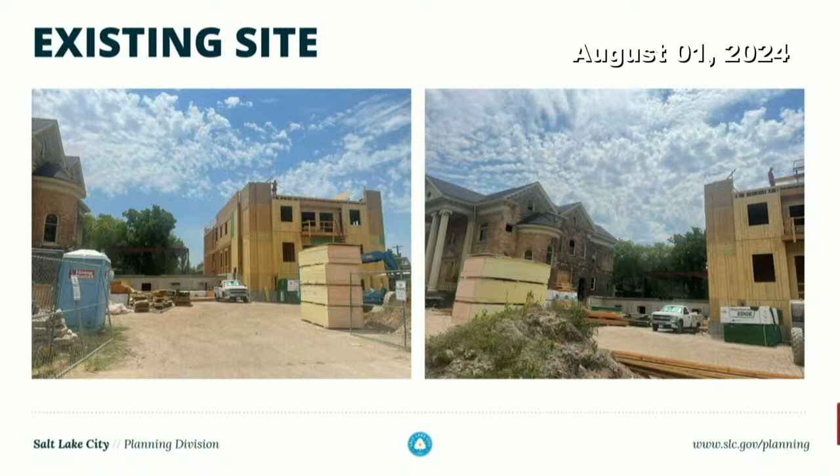This project has had some previous approvals. It was originally approved by the HLC in 2017. There were some administrative changes to the approval in 2018 and 2019, and then an additional modification was approved by the commission in 2021. There's a discussion of these attached to the staff report, including the previous staff reports, and a summary of the administrative changes. Staff is recommending approval of the proposed changes.

That concludes staff's presentation, and the applicant is here and wishes to speak. Do we have any questions for staff yet? Okay, then let's go ahead and bring the applicant up.

And the applicant is Brandon Harris. Hello, Phil. Brandon Harris works with us. Okay, thank you so much for hearing me, ladies and gentlemen of the council. I appreciate your time. We had a... can you press? Got it. Turn on your microphone. There, can you hear me now? I can hear you now.

We had an unfortunate set of events. The architect and our owner, who we're building for, has made so many modifications to the plans, and you can see over the years it's been to you so many times. In the time period that we started the project, the architect has passed away. The architecture firm was Smith Hyatt. They're no longer in business. Amazing architect, but we spent about $500,000 on plans only because the building was redrawn 14 times.

So we made the decision that it'd be better to tie the brick in from the original building back to the new building, but there's still a delineation between the new brick and the original building, and to create the parapet so that we can drain water off the other side of the roof. These changes for us made sense.

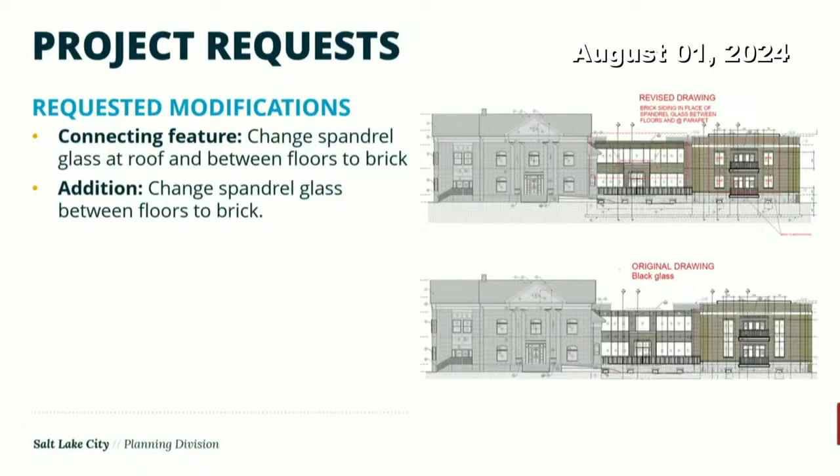You also can't physically do spandrel glass to a flat wall, you have to have something that carries over it or above it. What is spandrel glass? Sorry, I'm not an architect. It's glass panels that are connected together through an inside system, but they come to a flat top. You can put usually like a metal cap over it, but in this original design, it showed that the spandrel glass ended at the top of the roof. That doesn't sound right. Good, okay.

Anything else? That is all at this. I would like to ask another question, and you can say no. On the original building, they have... and she's gonna be mad at me because this wasn't part of it.

They have precast in there, but the sandstone that we took off the building originally, that's absolutely gorgeous. We would like to use that sandstone as the band to kind of show that there is something old with something new on the two white bands, and I'm sure I'm gonna have to fill out another application, so I'm sorry, probably just threw that in.

So it's the white, I'm trying to buy 2 cars for 1 price. I get it. So it's the white sandstone? Yes, it's the sandstone that's on the, it's like a tan or a cream sandstone.

But it's not your regular red sandstone. I was literally there yesterday filming the back of the property to point out in a TikTok I'm doing about how the sandstone is black from the coal dust we used to have. It's really evident, and a wonderful picture to show people how bad our air used to be.

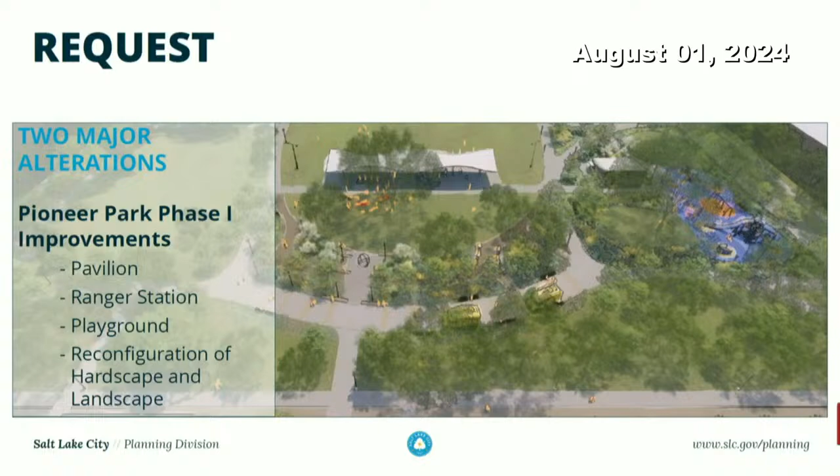And for this work session, we're hoping to have a discussion on the design so that it can be finalized and returned to HLC for a decision. The 2 major alteration applications for the improvements include a pavilion, a ranger station, a playground, and the reconfiguration of the hardscape and landscape in the park.

This work session request is specifically to answer 2 questions so that staff can gain better direction and that the Public Lands Division can finalize the design. The 2 questions are on this slide.

So first, does the Ranger building meet the guidelines of the Pioneer Park CLR, namely appropriate materiality, transparency, articulation, and form? And second, do the proposed new buildings, both the Ranger building and the pavilion, appropriately meet standard 8 and 21A 34020 G8 for contemporary designs?

If the Ranger building is, quote, compatible with the size, color, material, and character of the property, neighborhood, or environment.

So just a little background. Y'all know Pioneer Park, but just briefly, it is located approximately 350 South, 300 West. It does encompass an entire city block, and it was the city's first park to be listed on the National Register of Historic Places, and is also a local landmark site. This is the first phase of improvements for Pioneer Park, located on the north portion of the park and includes approximately 3.5 acres for Phase 1.

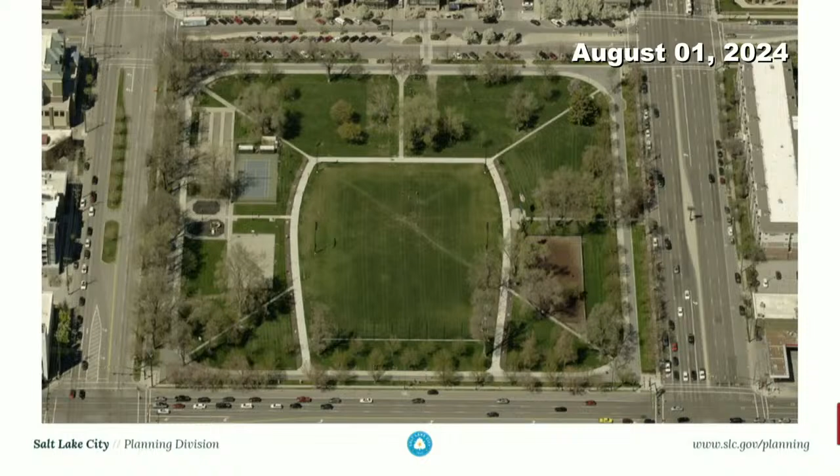Currently, there are mature trees, open fields, a tennis, bocce ball, and volleyball courts, and it is home to many community events.

So the changes to the site design and the hard surfacing include...

Actually, let me back up a little bit. The CLR was heard by this commission in 2023 and was adopted. The Pioneer Park CLR, a cultural landscape report, prescribes guidelines for alterations to this landmark site that the proposed Phase 1 improvements may be weighed against.

This map, I'm confused, should it be flipped? Because we've got 400 West and then 300 West over here. This is the northern portion of Pioneer Park. It's just cut. Oh, I see how we're doing it. Okay, so it's half of the block. Sorry. That's okay.

The interior circular ring facilitating pedestrian movement will remain on the site, as will the exterior circular pedestrian ring and cardinal access from the exterior to the interior ring.

Phase 1 improvements will include expanding the hard surface circulation in the park to include a meandering hard surface walkway. This walkway will also facilitate food trucks.

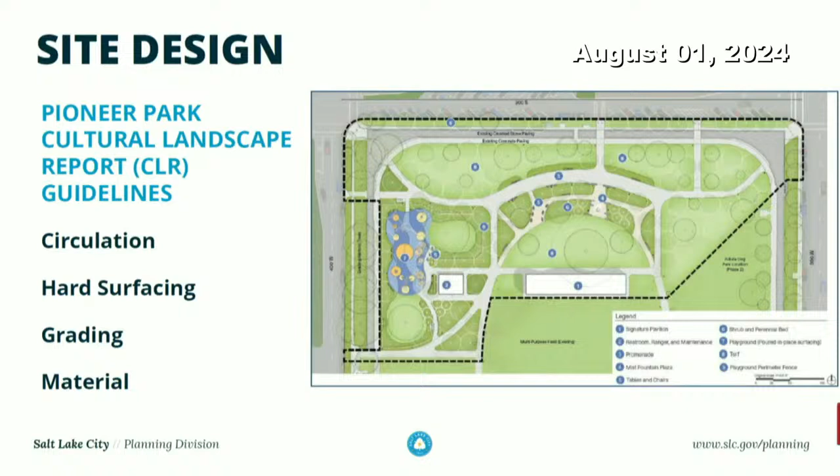The topography of the park will remain the same, and while hard surfacing in the park will increase, it does meet the recommended maximum stated in the CLR. It appears to staff that the recommendations in the CLR are being met with the proposed site design alterations.

So next, the pavilion. This is a major focus of the landmark site and will be placed in this northern area. This will also facilitate public or private events in Pioneer Park.

It's approximately 150 feet by 30 feet, encompassing approximately 4,500 square feet. It will have a rolling form constructed of standing seam metal roofing and tube steel, oriented to the south lawn and the north lawn areas.

And now the Ranger Building. The land use is a restroom, a park ranger station, and maintenance. The size is approximately 1,080 square feet, and it will be oriented toward the north and the east.

The material includes a painted steel awning, proposed to be along the north and east facades. Those facades allow access to the public restrooms and the Ranger Hub. This tube steel awning will reflect the design of the pavilion to the east.

The west and south facades will have minimal architectural articulation and will generally only consist of building access for mechanical and maintenance facilities. The majority of the exterior will be cast-in-place concrete with an accent wall highlighting restroom entries. Perforated metal screening will be located at the Ranger Hub and kiosk.

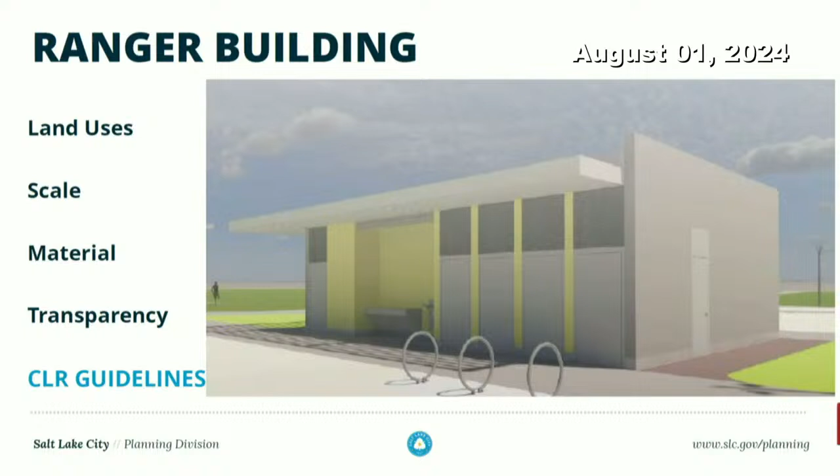Transparency has been a sticking point with this building. The CLR guidelines recommend that a minimum of 60% transparency is maintained. This is not currently being met and will need to be updated prior to the design returning to HLC.

So the playground and the water feature will be located west of the Ranger Building and the pavilion. The existing park features—bocce ball, volleyball, and tennis courts—will all be removed. The water features are proposed to the north of the pavilion and just south of the promenade.

In this 30% plan set, the water feature will consist of a mist fountain. The final design of these features will receive direction from the Salt Lake City Arts Council prior to the final design returning to this commission.

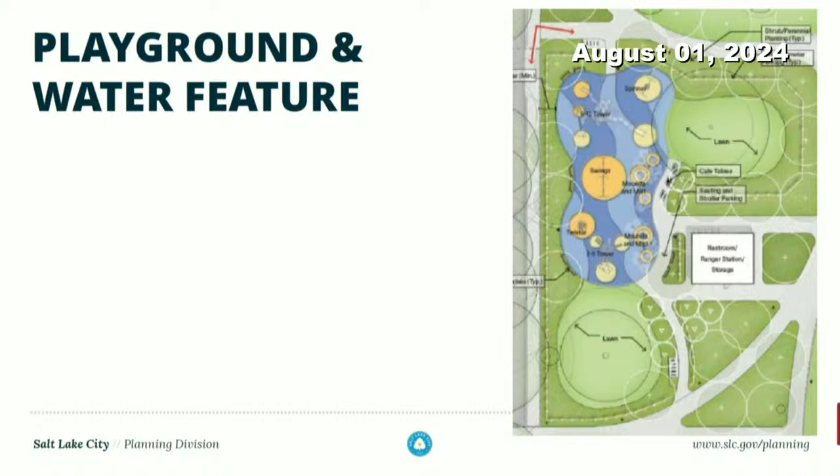Okay, for our discussion topics, back to those two original questions that I proposed at the beginning of this presentation. I can pull this slide back up after. Okay, so the first question, let's deal with that.

Meeting the guidelines of the Pioneer Park CLR, appropriate materiality—so the materiality is concrete. It's a concrete box, and it doesn't have a lot of transparency. That's correct. You said the rules are 60%. What's it at right now?

Nancy can answer that question. I think the best approach would be to have Parks and their consultants provide their presentation, and then come back to these questions, if that's okay. That sounds like a plan.

Okay, so do we have any questions for staff before we bring up the rest of the folks? Are the two major applications the two buildings? I just want to make sure. And the site changes—so why are there, what are the two specifically major alterations? I think I can look to see how we separated it out, but there are two applications right now. I'm assuming one for the new buildings and then one for the site changes. Okay.

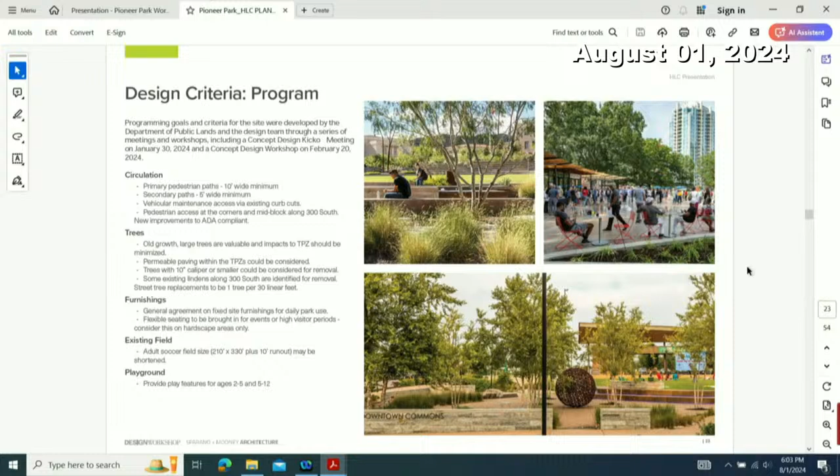Go to the next page. So here is an image of the existing conditions and the key criteria from the cultural landscape report that applied. The National Park Service has established the standards for cultural landscape reports, and that report provided specific guidance on topography, circulation, vegetation, and compatible alterations.

In addition, Public Lands is also seeking SITES certification for this project, which is a corollary to LEED, so advancing sustainability. One thing to note is the design team worked closely with urban forestry to understand the tree condition and tree protection strategies to minimize impacts to trees. This greatly informed where we located all of the features to minimize removal of trees and maximize their protection. The Urban Forestry Department's site requirements for tree protection exceeds the city standards, so we feel really good about that.

We can go to that next slide. Did the city kill all the trees on North Temple?

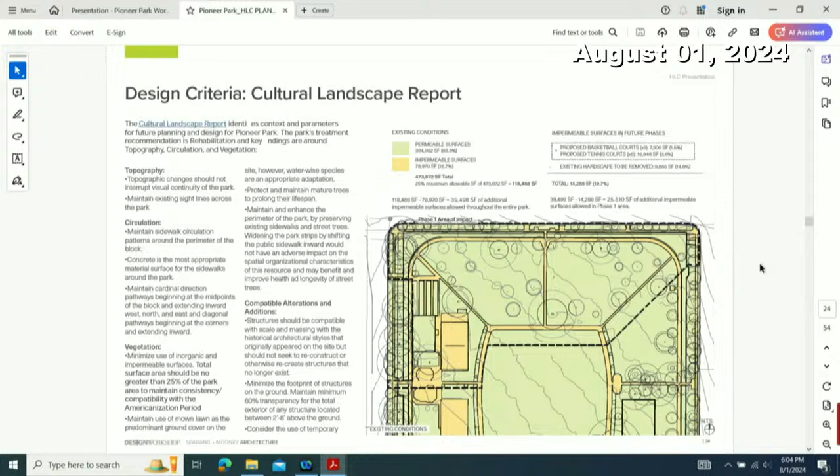So we also presented that cultural landscape report. Let me check my notes here.

This diagram is the analysis of the paving, showing four different symbols. It calculates the amount of existing impermeable paving that's removed and the amount being added. The goal is to stay under 25% so it remains largely a softscape park, consistent with the Americanization period. There will be some concrete for major circulation required for access during events or maintenance, while pedestrian circulation will use softer surfaces—we're exploring softer permeable options.

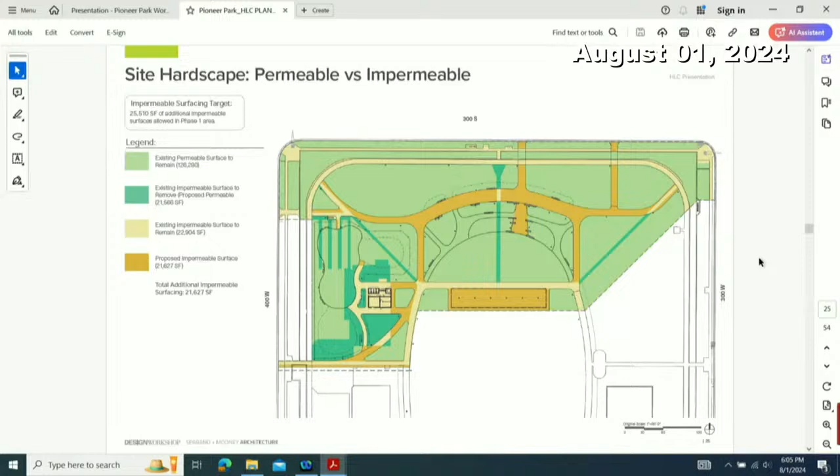Let's go to the next slide. The site plan shows the layout of circulation with the architectural features, and we've added as many new trees as feasible. You'll notice there are no trees north of the food truck promenade, that curved element at the top, because there's a requirement for 10 feet clear around food trucks. So instead, to bring the scale down, we brought the plantings very close to that space.

With this, I'll turn it over to Nate King with Sparano Mooney.

As was briefly introduced by Kelsey, we'll focus on two architectural elements this evening: a 4,500 square foot open air pavilion and a 1,000 square foot building that includes restrooms, a maintenance storage element, and a ranger office hub space. These elements are the result of many meetings and work sessions with public lands, with feedback from urban forestry, parks, city events, maintenance, and the park rangers department.

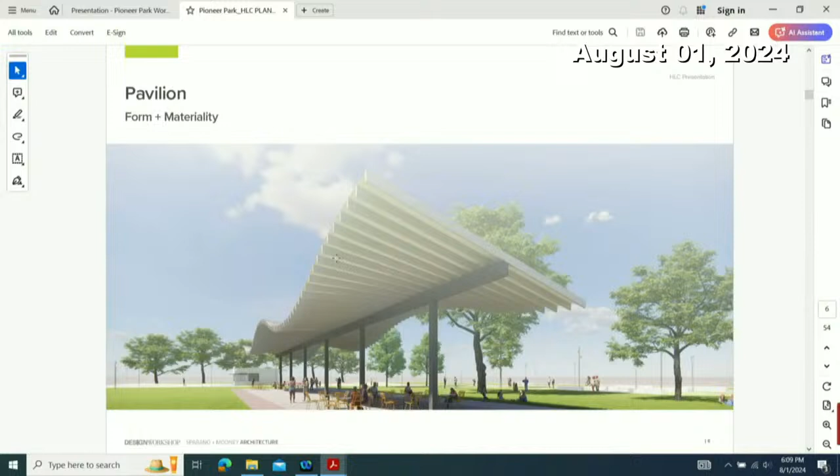After much discussion, the stakeholder group wanted the roof of the pavilion to be solid or impervious, so rainwater won't penetrate through. The roofing material, as Kelsey mentioned, is proposed to be a standing seam metal panel. These standing seams will mirror a similar pattern to the tube steel members below the roof, creating a repeating form on the roof.

Will it have lighting? Yeah, actually, that's a really fun part of it—I'll get to that in a minute.

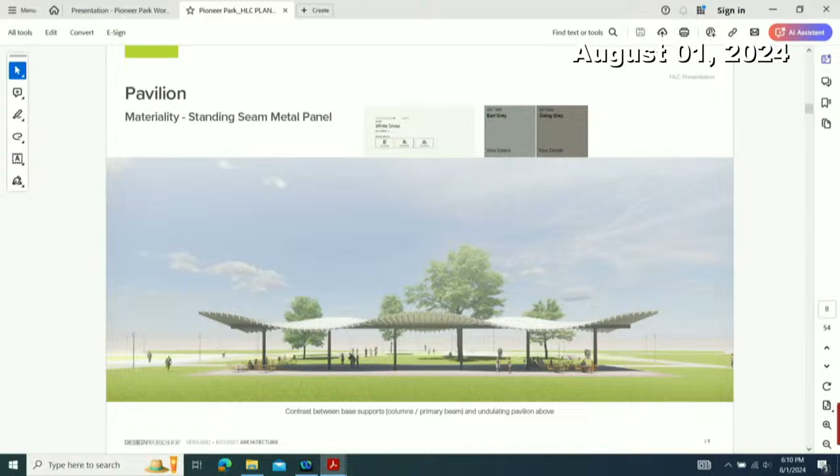Following up on that, this is one very interesting design point we've incorporated. The primary girder, at the center of the pavilion, functions as the primary structural support but also as our electrical raceway—all of the lighting is housed within this beam. We have safety down lighting on the bottom and accent LED lighting on the side, so we can illuminate the underside of the pavilion and even potentially incorporate color depending on the event. Lighting has been a pretty big discussion on this project.

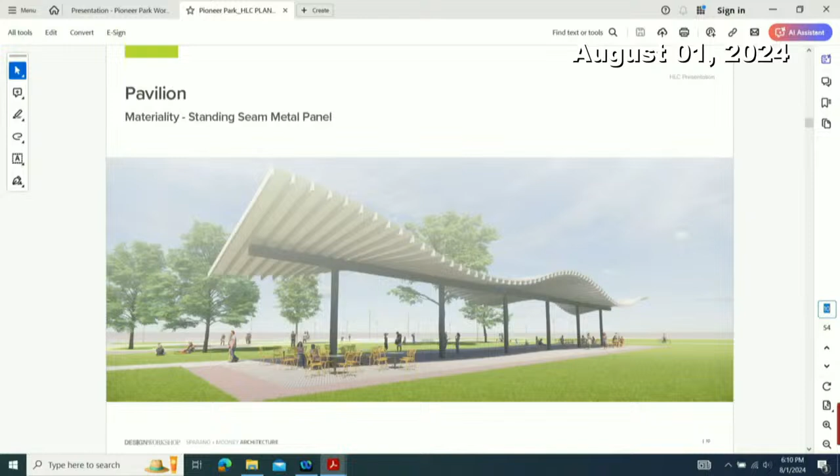So that's the pavilion. I think we'll go to the restroom building and then circle back for comments on each. This is an important diagram. With the pavilion being the architectural focus of the park, the restroom building intentionally utilizes a smaller scale to be both subservient to and also exhibit more of a human scale within the site. The focus of the project is intended to be the pavilion, and the restroom building becomes support for the project.

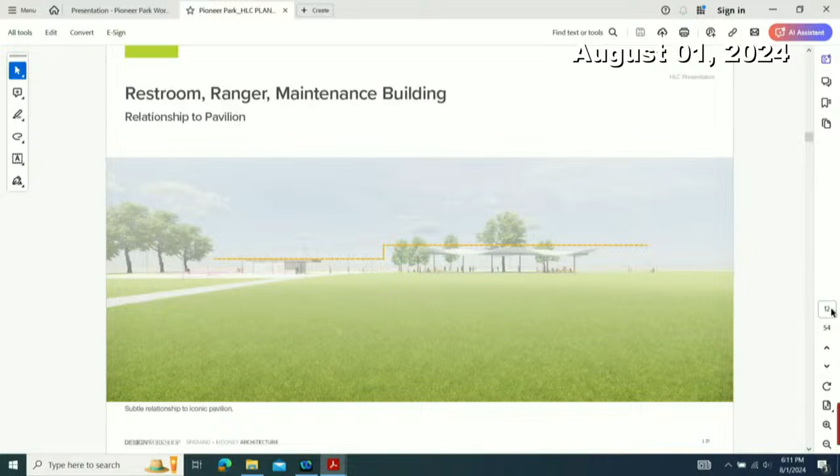We want to highlight a few important ideas from the SLC Design Guidelines, Chapter 13, new construction, but also the Cultural Landscape Report generated for Pioneer Park. Section 13.8 addresses bringing a sense of human scale, so we incorporated a 14-foot max height for the restroom building. 13.9 reflects the character of roof forms in the area, noting flat roof forms as appropriate. 13.15 encourages overhangs, projections, and reveals to create light and shadow patterns. 13.20 addresses materiality, requiring proven durability, which we'll get into more.

The Cultural Landscape Report includes a few key ideas. It notes that the design should be a clear record of its time, place, and use, and not create a false sense of historical development. It should not seek to reconstruct or otherwise recreate structures that no longer exist. These are just a couple of notes to keep in mind as we move into more of the design for the Ranger Hub.

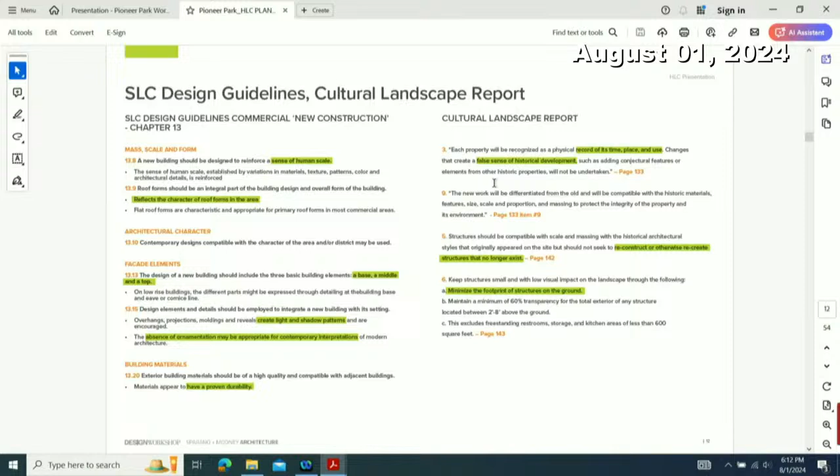From a design standpoint, we created a subtle relationship between the pavilion and restroom building through the use of similar materials. This includes exposed HSS tube steel members that create the primary framing for the pavilion and overhead shade element for the restroom building. Architecturally, the repetition of the HSS tube steel on the pavilion is reinforced on the restroom building, both in scale and color.

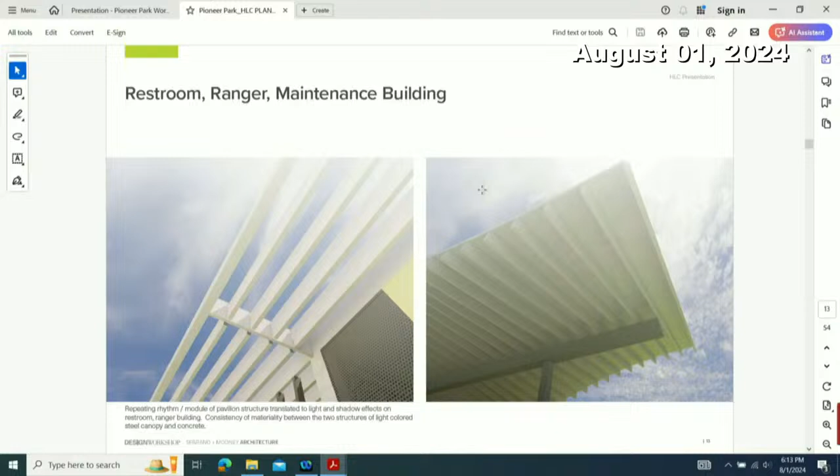Given the program for the restroom building, there's a clear public face oriented to the north, where the restrooms are, and to the east. So the east would be the Ranger Hub, and north is the restroom building. There was a desire to create visual cues that this is the public side of the building and the side you are to approach. Maintenance, storage, and mechanical plumbing program make up portions of the south and west, which we'll look at in a moment.

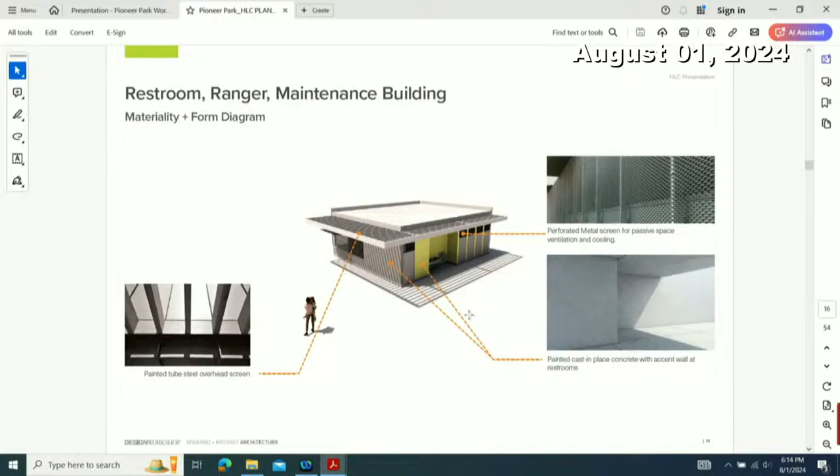The primary material proposed for the restroom building is cast-in-place concrete that will receive a painted finish. Based on preliminary discussions with planning, this also has a relationship to cementitious plaster that was historically used in this area. This provides a durable, robust exterior material that is tamper resistant and easy to maintain. We have proposed a splash of color to be introduced on the north where the restrooms are located.

The west facade includes access to the mechanical plumbing space, and the overhead coiling door on the south provides access to maintenance storage. The south portion of the Ranger Hub can be seen on the right with perforated operable shades that allow the windows to be protected and provide additional articulation to this facade.

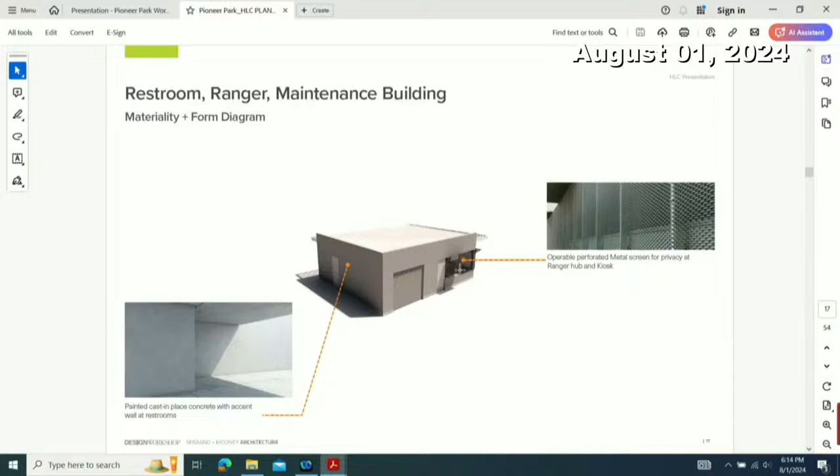A perspective from the southeast shows the relationship between the pavilion and the restroom building. Again, in addition to the HSS roof element providing an overhang projection, it also contributes to the exterior materiality through the use of light and shadow.

Questions for staff? I have a few. When is the ranger station open? Is it open 24/7? It is not open.

It will not be open 24/7. Okay, what so-

The ranger program has hubs in each part of the city, and they use that as a base point, and will also do some programming out of that space, using it as their base and also being in parks within the vicinity.

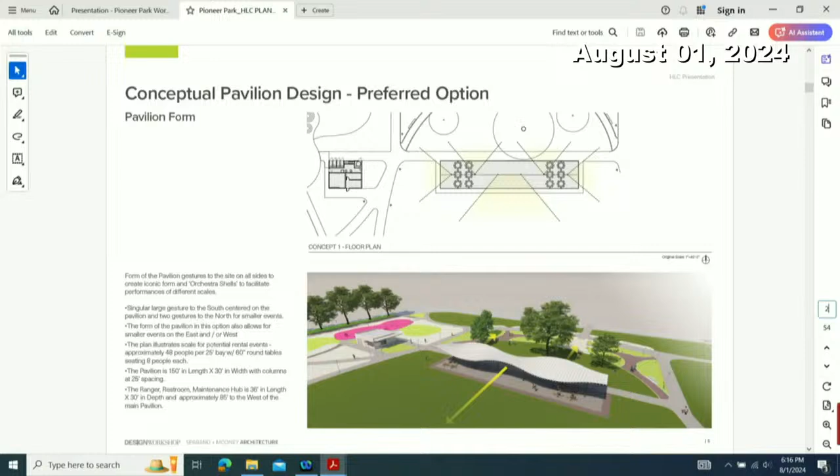Can you go to the previous slide that just shows the ranger station? My office has been in this neighborhood for the last 25 years or so, and I've lived in this area for a long time and have witnessed massive crime, watched a stabbing outside my building that I had to go to court and testify against the 5 people involved. So I know a lot about this neighborhood, and I've been in a million meetings about it.

That building to me looks like a giant billboard for graffiti. The windows themselves look like they will be busted out every week, just by people that aren't mentally stable, because that happens in our neighborhood constantly. The glass itself, will it be protected at night?

The other side where you had the water fountains, next to it seems to be a long trough, which to me says, oh, if I'm unsheltered, maybe I can take a bath there. Happens all the time. Any kind of water feature is going to be used as bathing possibilities for the unsheltered. Those things worry me a lot, but the building just stands out as a big ugly box that's going to have graffiti on it at all times. That's my 2 cents worth.

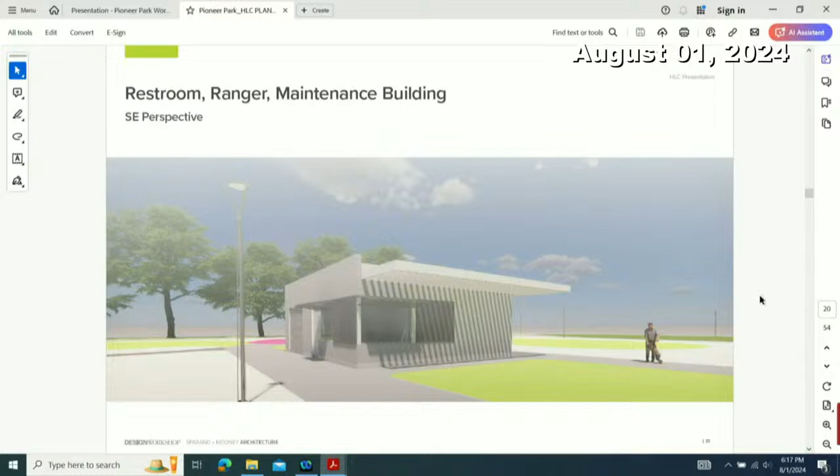We have thought about that too, especially the facades that are more blank. It could be an opportunity. We have public art, and we haven't yet selected a public artist. That would be great, but that should be a priority, because graffiti artists are less likely to damage public art.

But I don't see any of that in here, and this again to me says, mess with it, and the neighbors will. We have had our office in that neighborhood for many years too. It's not there currently, but we understand.

Where is the signage? There's no signage on your renderings. We have developed signage in another project, but they are not in this. And remember where we are in the design process also - we haven't finished the design. This is our working session, and these renders are also preliminary. Okay.

How many food trucks does that area hold? 8. Just 8. And how are food trucks chosen? Don't know. That's okay.

Why does the building have such low transparency? Kind of the nature of the program being primarily restrooms, maintenance, storage, and mechanical space.

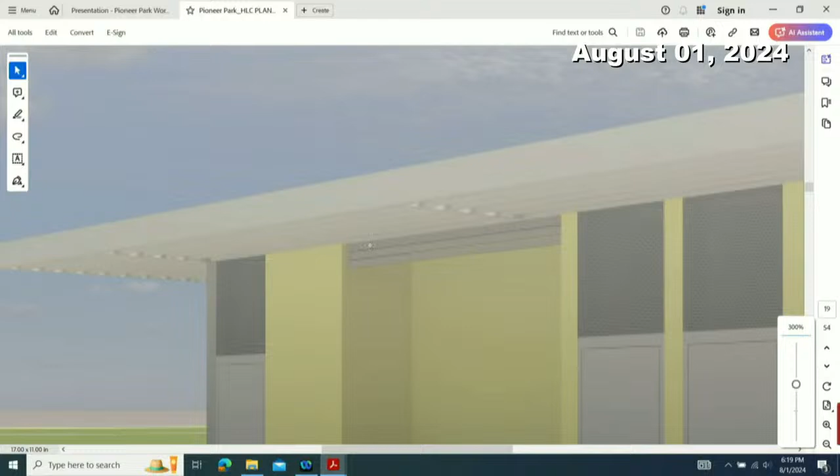And actually we thought about that as well, adjacent to this, which would be the sinks. There's a desire to have these as single stall toilets and incorporate the hand washing stations outside. You can see a small hint of it - there's an overhead coiling door intended to be implemented there, so seasonally it can be completely shut down and even potentially...

So there's only one public toilet in the neighborhood on North 5th West, behind the train station there. And that specifically was researched for a couple of years as to what would be the best public toilet.

And that toilet, you can see people's from their knees down. So again, this looks like, oh hey, it's only going to fit 1. Trust me, it'll fit 4, and they'll be doing drugs in there. There's no windows, you don't know who's in there, you don't know how long they're in there - they could be sleeping in there overnight. I mean, this to me is just such a nightmare of policing.

I think that's something we could incorporate, as lifting up the lower part. Well, I would talk to Edgefront - I think Camille was one of the ones that really helped put that in, but I would talk to folks about that particular restroom, because it's the only thing we have of its kind.

It's also a hub for a whole lot of bad things. Yeah, but this is an extra bad thing because you can't see who's in there, how long they're going to be in there. That's all I have to say about that. Now, who else has questions?

I would just say a couple comments. I appreciate the restroom ranger maintenance building is a tough architectural challenge, and I appreciate that you're using materials that are as durable and maintenance-free as possible, that can be cleaned and hosed down. I like the fact that you've got the louvers that add some life to the face of the building as the sun creates shadows.

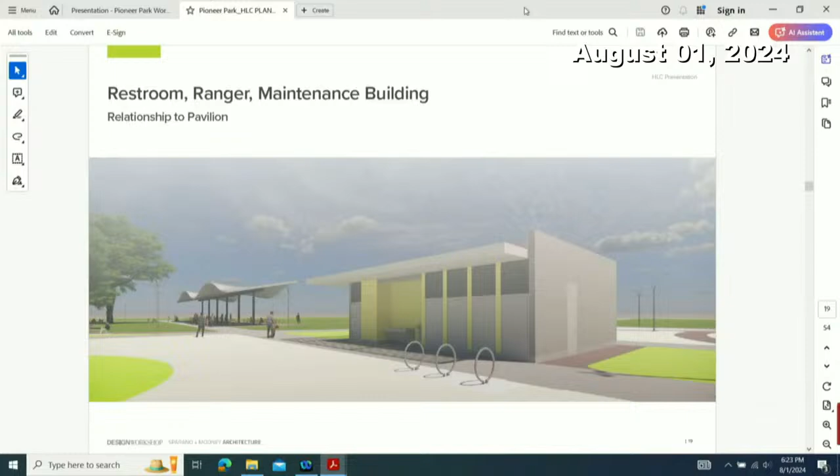And I would add on that, just to echo - concrete is easy to remove graffiti from, at least, right? But public art, in my experience, and there's a lot of research showing this, will deter a lot of the graffiti too. So I think that would be a good element to include in this as well. So thank you.

Anybody else? You can go first. Just kind of echoing what Mike said, I really like the pavilion. I think it's neutral at the same time as it's kind of whimsical and fun.

Is whimsical and fun... that pavilion? No, not the pavilion, the other one, the restrooms. I do like it. I think the north facade and the east facade are pretty nice, especially with that kind of canopy shade when it casts light onto the building. That is pretty cool, and it gives it a texture that I think is really nice.

But yeah, it is that west facade to me that's a little barren. I think you talked a bit about the sense of human scale, and one way of accomplishing that is to make it just a smaller, shorter building. Another way would be to use more textured materials that kind of invite someone to come up to the building and touch it and experience it at a closer proximity. I like the board form idea - I'm a big board form guy - but just something to break it up so it's not a big slab.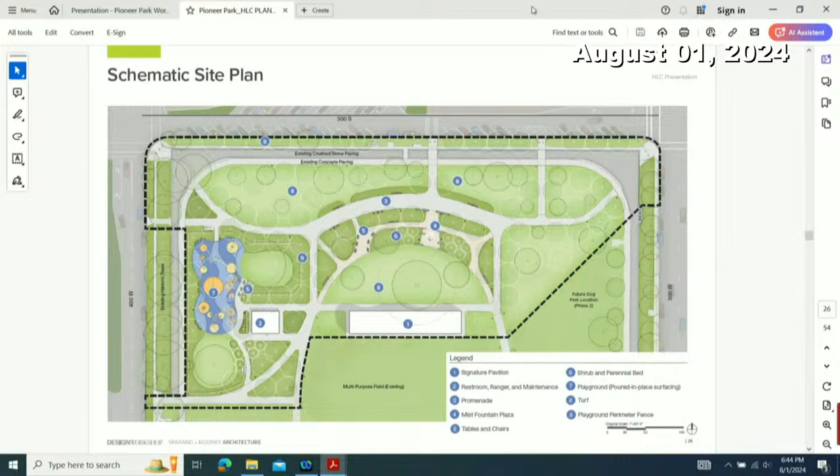And the pickleball should not be near all the condominiums on 3rd South, but more on 4th South because of the noise. You know the noise complaints about pickleball? Yeah, massive, it's very loud. It's true. Yeah, well, good.

I guess that's all we have for you. I'll make one other comment, actually, if I can. Thank you, building on the materials real quick.

The one thing that struck me when I first saw this was the starkness of the concrete, which has been mentioned before—can you put the mic up closer—and it reminded me of what I would expect to see at Gallivan Plaza or the Natural History Museum, other locations that are arguably more urban. Whereas the materials in this block, and I hear you about the stucco, but the materials that characterize this block in this neighborhood today are primarily brick, red brick on the buildings that surround this block from the turn of the previous century. And what did jump out to me in terms of materials and consistency of the materials with the neighborhood's materials is that there was none of that or a hint of that represented.

So just one other thought.

You know, I thought about that too, Carlton. Sorry, Babs, we just keep going on about this. But I thought about that too, but I also—the goals of this is not to recreate something that looks historic necessarily too. That was one thing I was like, I thought about that, and then as I read through everything, I thought, well, I guess that's not our goal to make a structure that looks like it was a part of the warehouse district. But I do think colors and the storytelling, there's things we can add to that. Maybe instead of a yellow on that, it's more of a red that looks like the color of brick in that neighborhood, things like that. I think Pierpont Urbana did a really good job with their apartments, making it look like it fits in the neighborhood.